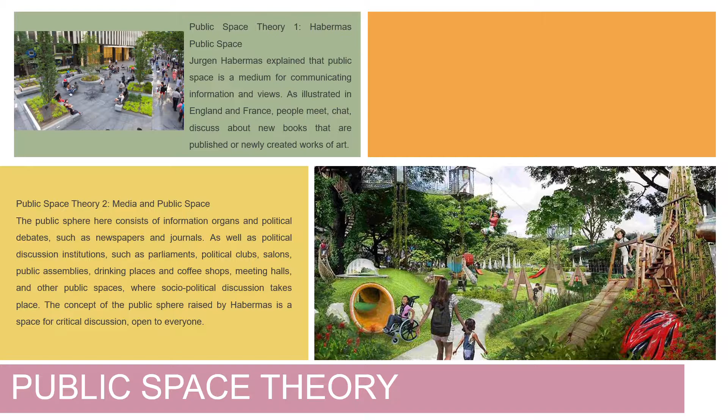Public Space Theory 2: Media and public space. The public sphere here consists of information organs and political debate, such as newspapers and journals, as well as political discussion institutions, such as parliament, political clubs, salons, public assemblies, drinking places and coffee shops, meeting halls, and other public spaces where socio-political discussion takes place. The concept of the public sphere raised by Habermas is a space for critical discussion, open to everyone.

Public Space Theory 3: Criticism of Habermas. In his magnum opus, The Theory of Communicative Action, Habermas criticized the unilateral modernization process, which was led by the force of economic and administrative rationalization. Habermas views that the increasing intervention of the formal system on our daily life is in line with the growth of the welfare state, corporate capitalism, and the culture of mass consumption.

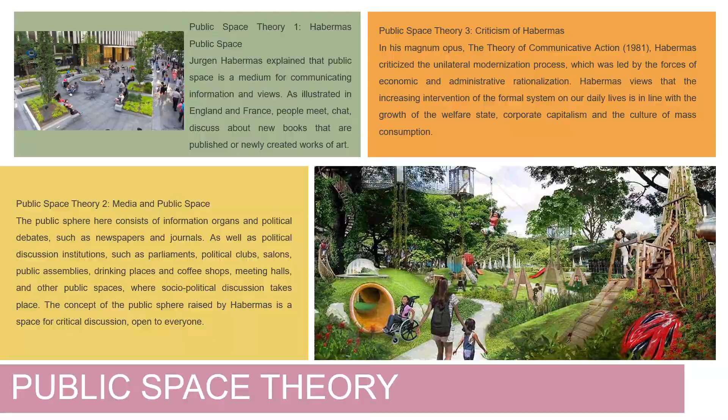Another theory of public space concerns factors describing successful public space. The first is identity of the historical public space, second is attraction between the place and the people, and then amenities—public space should be comfortable—and flexibility, meaning there is need to build in at the outset, and seasonal, meaning the public space can be used in any season, and access, meaning the public space needs to be easy and accessible, and the last is visibility: uses and activities can enrich the public space.

There is also type public space, of which there are 5 types. The case study is Marunouchi public space, which has lively public space. The public space is placed approximately every 300 meters, generating interest for people to keep wandering and making the city vibrant.

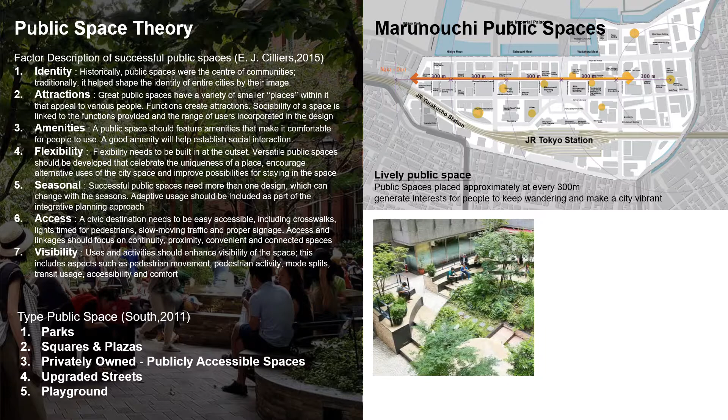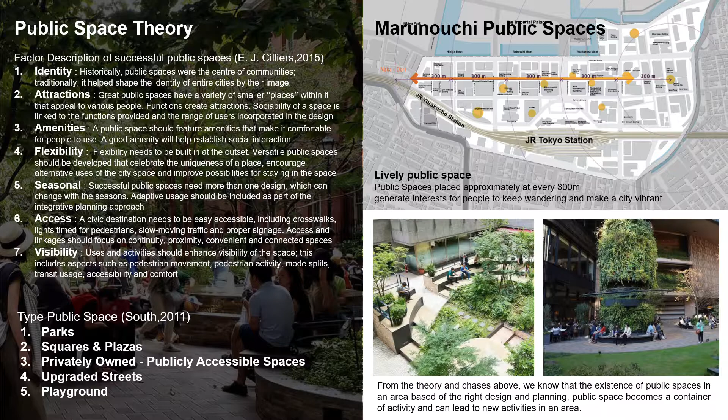From the theory and cases above, we know that the existence of public space in an area is based on the right design and planning. Public space can become a container of activities and can lead to new activities in an area.

Quality of public space: Quality is a dynamic condition associated with product, service, human resource, and environment that meets or exceeds expectation. The quality of public space can describe the fulfillment of the need for public space by its users, marked by the fulfillment of certain standards. A public space is of good quality if it meets the needs and satisfies its users.

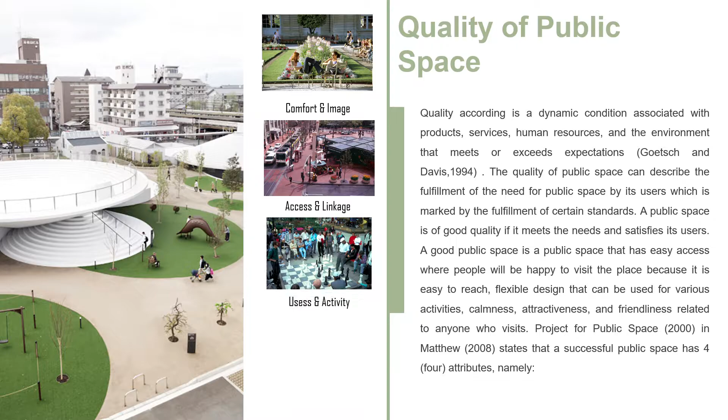A good public space is one that has easy access, where people will be happy to visit because it's easy to reach, has flexible design that can be used for various activities, and has calmness, attractiveness, and friendliness relating to anyone who visits. Project for Public Spaces states that a successful public space has four attributes: first, comfort and image; second, access and linkage; third, use and activity; and last, sociability. Quality of public space on Orchard Road.

Overall, the quality of public space on Orchard Road has a very good quality, which will be discussed as a whole based on the variables of good public space from the Project for Public Space. The first variable is comfort and image.

The quality of public space on Orchard Road has a good level of comfort for users or visitors, marked by the following attributes. First, security on Orchard Road is considered safe because there are many CCTV cameras along this road, the availability of good lighting at night, and police presence.

Second, there are many attractions for tourists such as shopping malls, unique building designs used as places to take pictures, and interesting attractions or street shows.

Third, the availability of seats on Orchard Road is very easy to find. The distance from one chair to another is very close, and they are in good condition and suitable for use.

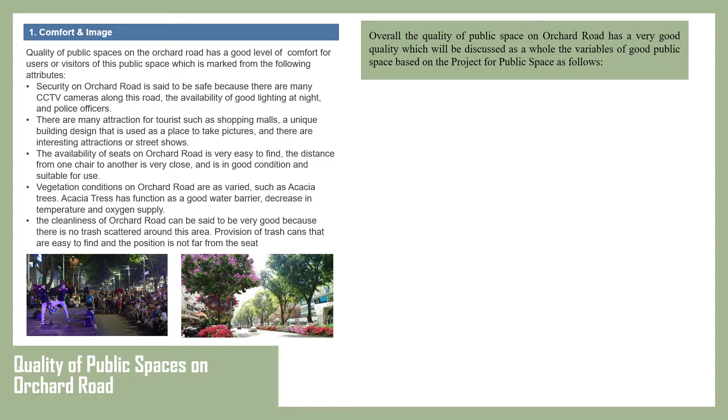Fourth, vegetation conditions on Orchard Road are varied, such as acacia trees. Lastly, the cleanliness of Orchard Road can be said to be very good because there is no trash scattered around the area. The second variable is access and linkage.

The level of accessibility owned by public space on Orchard Road also has a very good level of quality, marked by the fulfillment of accessibility attributes according to PPS, as follows.

First, pedestrian track design is very broad and has a safe track condition, providing for people with disabilities. Second, reliability, which is the ability to provide facility and infrastructure contained in Orchard Road.

This can be seen as seats, trash, shelters for the use of BRT have been available in good condition. Third, convenience can be seen from the absence of obstacles in accessing or carrying out activity along Orchard Road because all lanes are connected and in good condition.

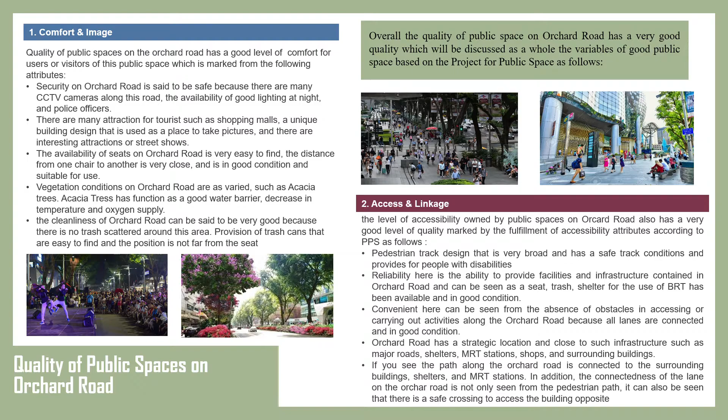Fourth, Orchard Road has a strategic location and is close to infrastructure such as major road shelters, MRT stations, shops, and surrounding buildings. Lastly, the path along Orchard Road is connected to the surrounding buildings, shelters, and MRT stations.

The third variable is uses and activity. A good public space is marked by the many activities that can be done by people, and this can be seen on Orchard Road, which has a variety of activities recorded at every time.

There are several attributes used in the uses and activity assessment on Orchard Road. First, the unique design of each building on Orchard Road is different from mall buildings in general, making it a characteristic of Orchard Road.

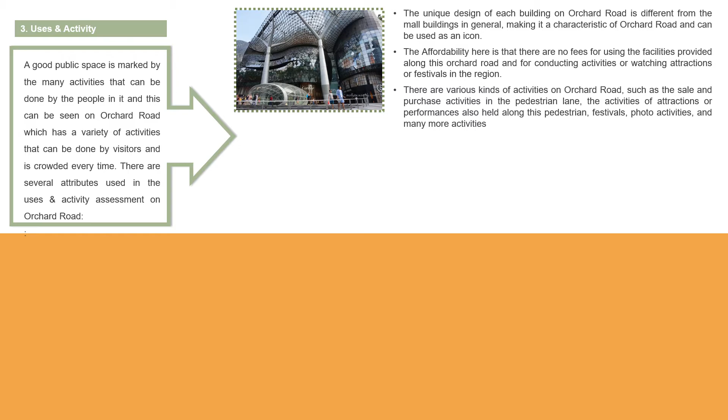Second is affordability, meaning there are no fees for using facilities provided along this route. Third, there are various kinds of activity on Orchard Road, such as sale and purchase activity in the pedestrian lane, the activity of attractions or performances held along this pedestrian area, and many more activities.

Fourth, in certain months such as Christmas and other holidays in this region, a festival is often held to celebrate it, and the surrounding buildings will be designed like a festival theme.

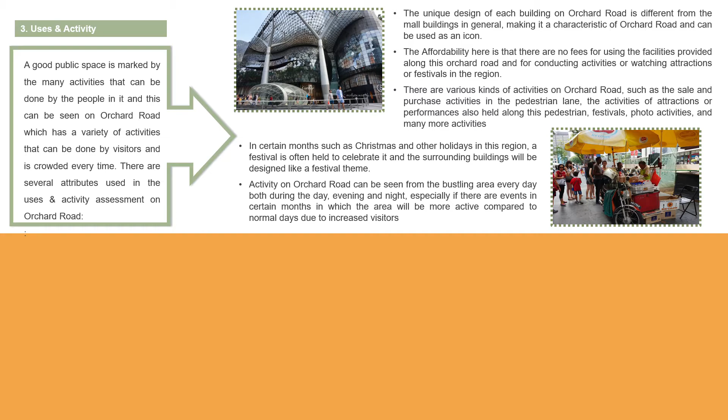Lastly, activity on Orchard Road can be seen from the bustling area every day, both during the day, evening and night, especially if there are events in certain months in which the area will be more active compared to normal days. The last variable is sociability.

Sociability describes the friendly feeling of the space to its users, and this can be seen when you visit Orchard Road. There are several attributes used in the sociability assessment on Orchard Road.

First, neighborliness is very much felt among visitors on Orchard Road, as there is interaction between visitors who help other visitors when they see them having difficulty taking a picture, or offering older visitors a seat.

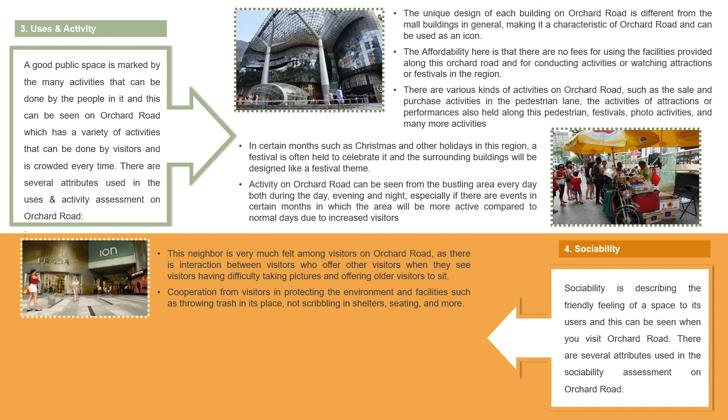Second, cooperation from visitors in protecting the environment and facilities, such as throwing trash in the proper place and not scribbling on shelter seating, and more. Third, openness, which is the freedom of Orchard Road visitors to use facilities such as seating and pedestrian paths.

Lastly, friendliness relates to designs that are friendly to people with disabilities, children, and the elderly, which can be seen in the pedestrian path design that is friendly for people with disabilities.